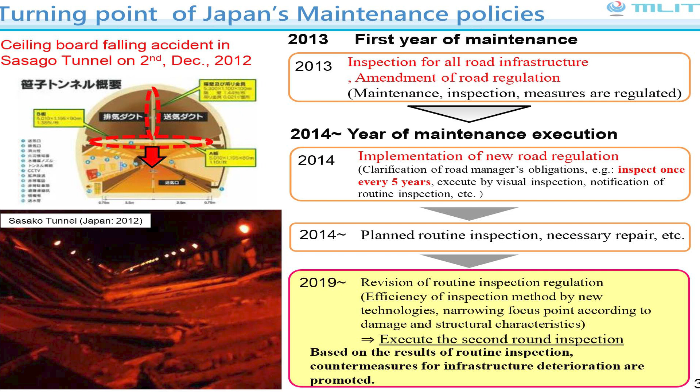One of the major turning points in Japan's maintenance policy was the accident at the Sasago Tunnel, a highway tunnel in Japan, as shown in the photo below left, just after the accident. In 2012, as shown in the upper left figure, there were concrete ceiling panels suspended from the concrete above the tunnel. They suddenly fell, killing a total of 9 people. The cause of the falling ceiling panels was lack of maintenance of the upper bolts.

In Japan, the Road Law already existed at this time. However, the law only mentioned the minimum responsibility about road maintenance for each road administrator. After this accident, MLIT recognized it as a serious accident and revised the Road Law in 2013, the following year. And as the first year of maintenance, we decided to start inspecting bridges, tunnels, and other road infrastructure in accordance with the new road regulations.

According to the revised Road Law, in 2014 this new regulation was enacted. This new regulation clarifies that all road infrastructure must be inspected once every 5 years. And periodic inspections are an important duty for all road administrators, which led to the start of simultaneous inspection in my country. Currently, we are proceeding with the second round of inspection and preventive maintenance.

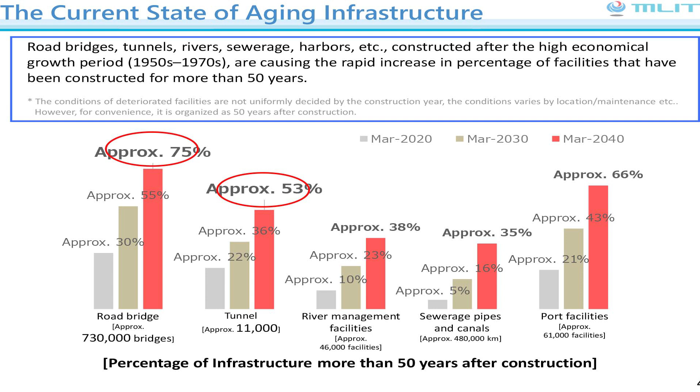As I mentioned earlier, much of the infrastructure in Japan was built in the 1960s, and we are about to see an accelerating increase in the number of infrastructure more than 50 years old. Among these, focusing on road infrastructure such as bridges or tunnels, the percentage of those more than 50 years old will be about 75% in 2040, and for tunnels about 53%, which is higher than other infrastructure such as rivers or sewers.

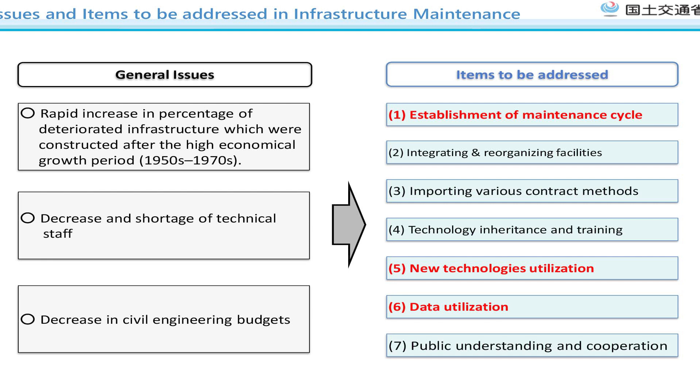Next slide. Okay. So next part, I want to explain the establishment of the maintenance cycle. First, we would like to explain the trends in Japan's road-related budget.

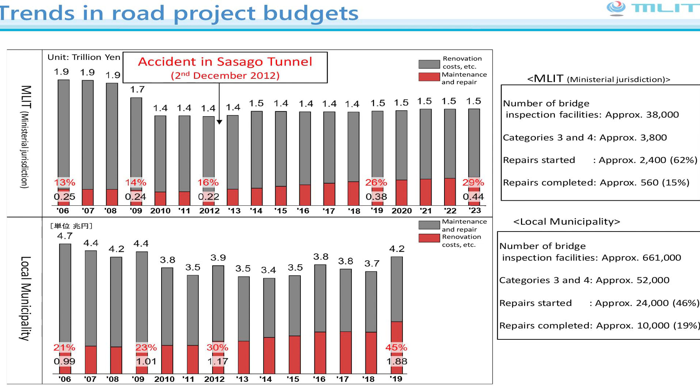The graph above shows the government's direct budget, which has been maintained at approximately 1.4 to 1.5 trillion yen since 2010 in the initial budget. This scale is roughly equivalent to $10 billion US. In this amount, the red line represents maintenance and repair expenses, which in 2012 amounted to approximately 200 billion yen, or only 16% of the total budget.

However, after the accident of the Sasago Tunnel in 2012, the percentage of maintenance and repair expenses has been increasing year by year, and recently it has reached approximately 29% of the total, or 440 billion yen for the government's direct budget. Thus, MLIT is striving to secure the budget for maintenance and repair expenses under the direct control of the government.

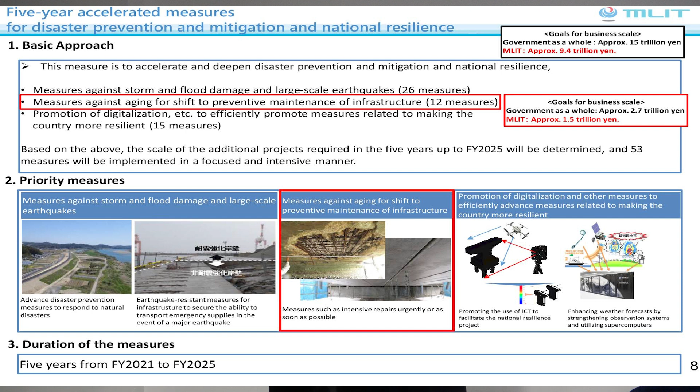In addition, measures to address aging infrastructure in order to shift to preventive infrastructure maintenance are also included in this amount, which is estimated to amount to approximately 1.5 trillion yen over a 5-year period. So if we take a divisive approach, it indicates the idea of taking additional measures on the scale of about 300 billion yen per year.

The background to the establishment of this program is that, in addition to the increased importance of maintenance, there have been enormous disasters in Japan, which led to the establishment of a separate program that combines maintenance and disaster prevention as well in this way. Okay.

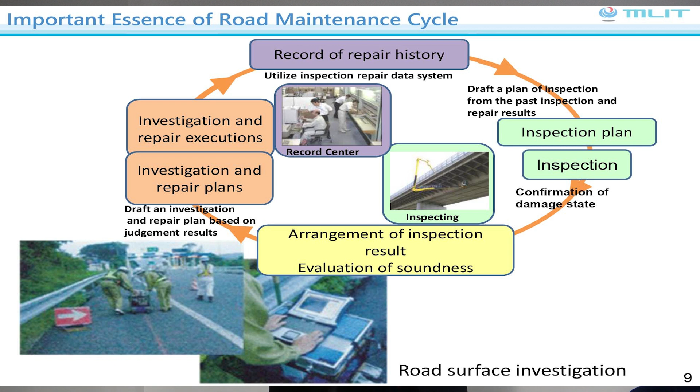Finally, we must not forget to record the result. Of course, it is important for the human body to undergo periodic health checkups, and in the same way it is very important to ensure that the infrastructure is maintained based on this maintenance cycle. As for this maintenance cycle, it is generally recognized that it has four components, just like this: inspection, diagnosis, repair action, and recording, as shown in this row. Okay.

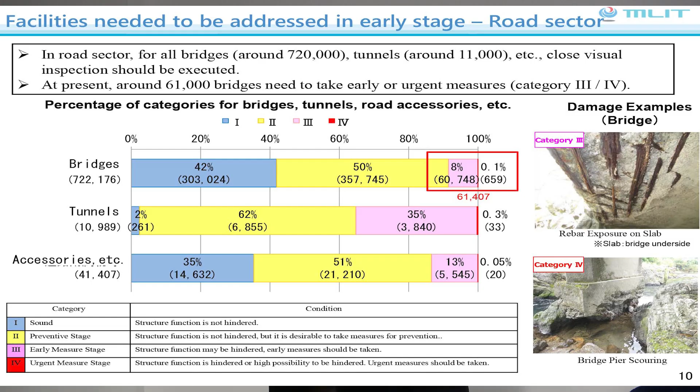Next slide. As I explained repeatedly, diagnosis is positioned as a part of the maintenance cycle in my country, Japan. This graph shows the result of diagnosis of bridges, tunnels, or road accessories. In other words, this is just a health checkup of each infrastructure. First of all, in the road sector, bridges and tunnels are inspected once every 5 years by close visual inspection. Based on the result of this inspection, each road administrator is required to determine the soundness of bridges in a total of four categories by law and regulations, soundness classification from 1 to 4, through discussion with experts who are familiar with bridge damage and other factors.

These diagnosis categories are also based on the Road Law and technical standards based on this new law. These diagnostic regulations are uniformly applied throughout the country, and these diagnoses must be made not only for each damage, but also for the structure as a whole. These diagnosis categories are 1 for sound, 2 for preventive stage, 3 for early measure stage, and 4 for urgent measure stage. For example, the photo on the upper right, which shows exposed reinforcing steel bars in the floor plate, is classification 3, while the photo on the lower right, which shows scouring of the bridge, is classification 4.

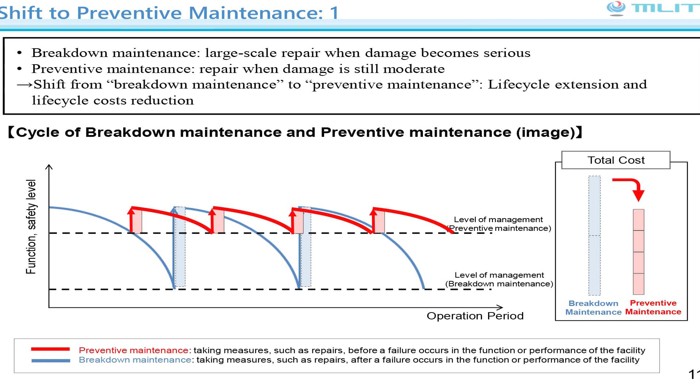Next, I would like to explain our attitude and approach to maintenance in my country, Japan. The most important concept is to implement preventive maintenance rather than breakdown maintenance. In other words, it is important to shift from breakdown maintenance, in which repair and other measures are taken only after failure has occurred in the function or performance, to preventive maintenance, in which repair and other measures are taken before failure occurs, as you can read in this slide.

The graph shows that preventive maintenance, the red cycle, will have a longer service life and lower the cost of each and every maintenance than breakdown maintenance, the blue one. Of course, as a result, the total cost can be reduced, as shown in the image on the right.

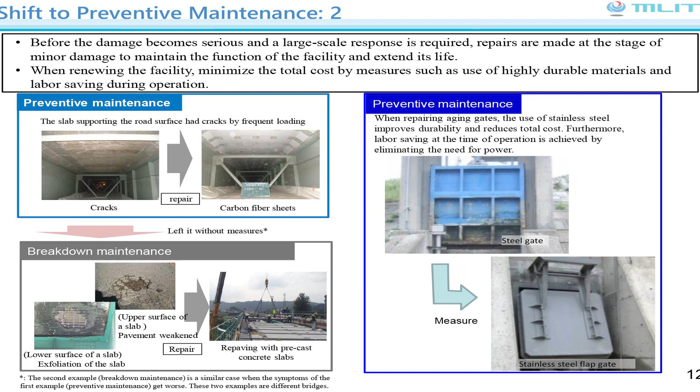The lower left gray shows an example which was recognized as breakdown maintenance, where damage was left as it was and major repair was made only after the damage became serious. Specifically, the bridge's superstructure was renewed by replacing the pre-cast slab.

On the other hand, as shown in the upper left photo, small scale measures can be taken by repairing the damage at the minor stage. Also, as shown in the photo on the right, it is important to minimize the total cost, including the use of highly durable material and labor saving during operation when renewing facilities.

Okay. We will then provide additional explanation from the specific monetary benefits and cost savings. According to the survey results of the 2018 estimate, if maintenance is performed based on the breakdown maintenance approach, it will cost approximately $82.8 billion for maintenance and renewal cost after 30 years. This is a big deal.

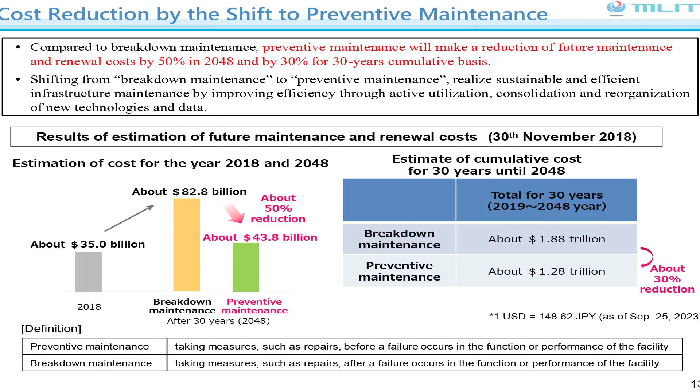On the other hand, the estimate based on the preventive maintenance approach resulted in an estimated cost of approximately $43.8 billion after 30 years. It means the total reduction will be about 50%. The total cost over 30 years can also be reduced by about 30% as well.

Thus, it is important to realize sustainable and efficient infrastructure maintenance by shifting from breakdown maintenance to preventive maintenance and improving efficiency through the active use of new technology or data.

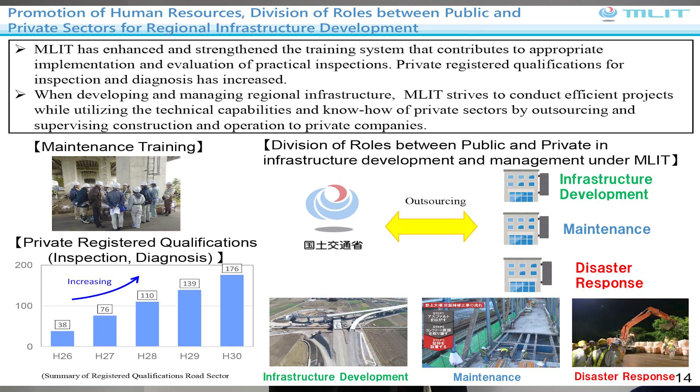Okay. So, I want to explain number 3, integration of new tech and data in this session. MLIT in my country has a system called the New Technology Utilization System, NETIS, which is designed to actively utilize useful new technology developed by the private sector in public work projects.

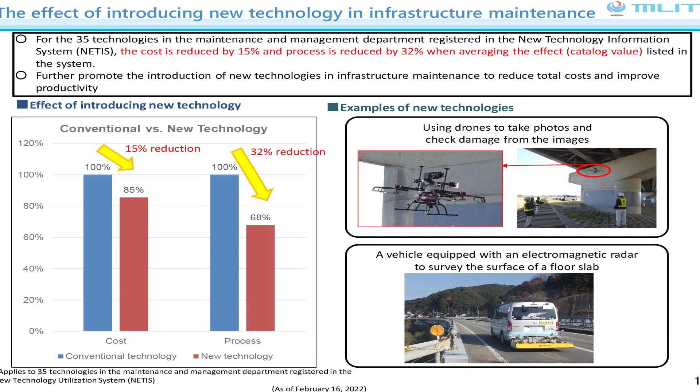The graph on the left shows the result of a trial calculation comparing the cost and the process for inspection using conventional and new technologies. As a result, it is estimated that the cost and process for inspection can be reduced by 15% and 32% respectively on average when comparing the conventional and new technologies.

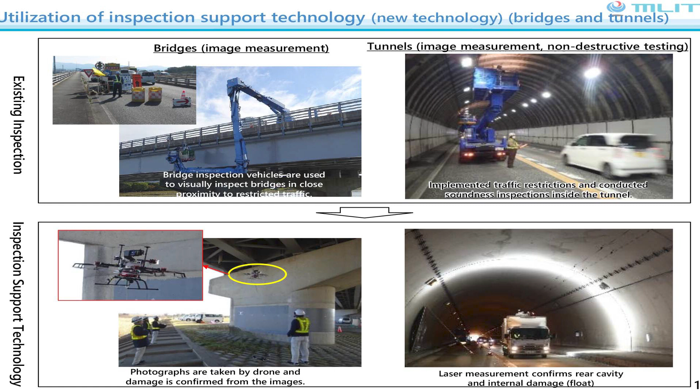So, in the past, as shown in the photo above, inspections were conducted by using inspection vehicles while traffic was restricted in my country. But as shown in the photo below, the use of drones and other technologies to check for damage is being actively promoted in my country.

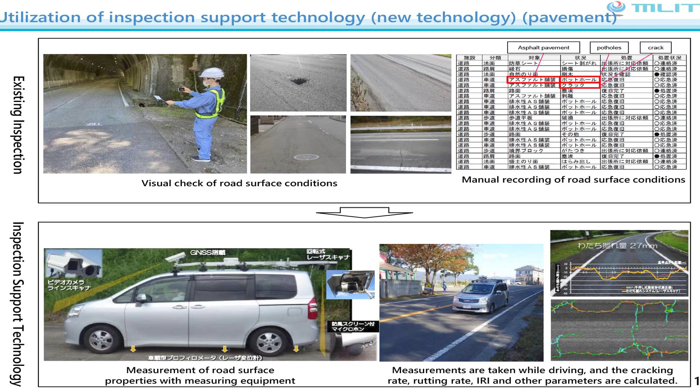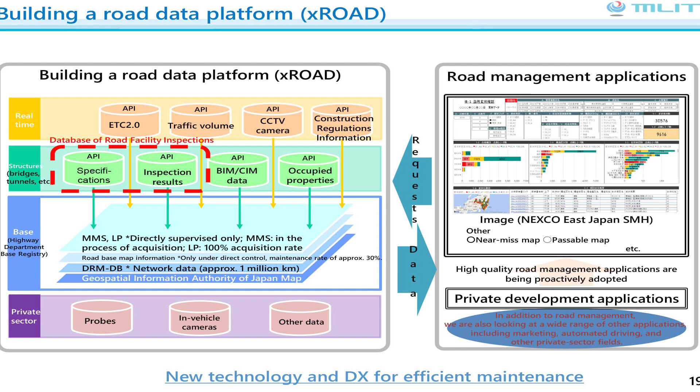We have started to compile a database of road facility specifications and inspection results for the area circled by the red dotted line in the figure. And in July 2022, we were able to compile a vast amount of data from road facility inspections nationwide and make this database available to the public now.

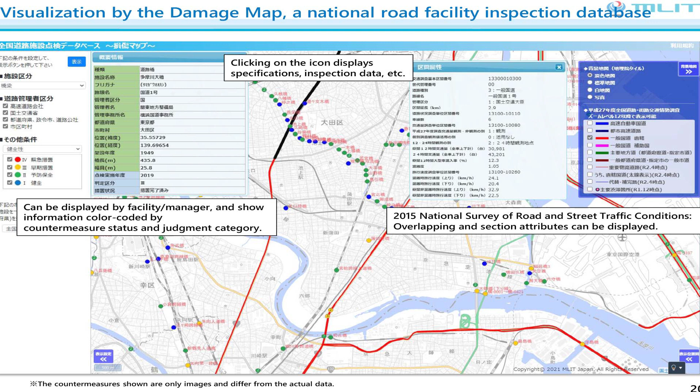This is just an example. This slide shows a damage map, a database of inspection results regarding road facilities nationwide that is currently available to the public. Just like this. In this map, when we click on a facility on the map, the facility specification, inspection data, and countermeasure status are displayed, as well as information on traffic volume.

In this way, MLIT provides easy to understand information on the current status of infrastructure and issues through visualization of information such as inspection results of road facilities.

Okay. This is today's last slide, and although it is still a process of trial and error in Japan in terms of road infrastructure maintenance, especially for bridges, I hope that today's lecture will be of some help to Romanian members as well.